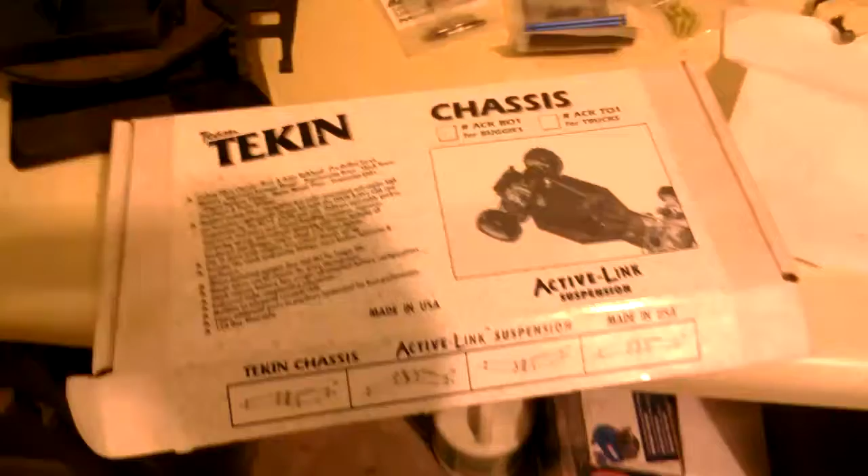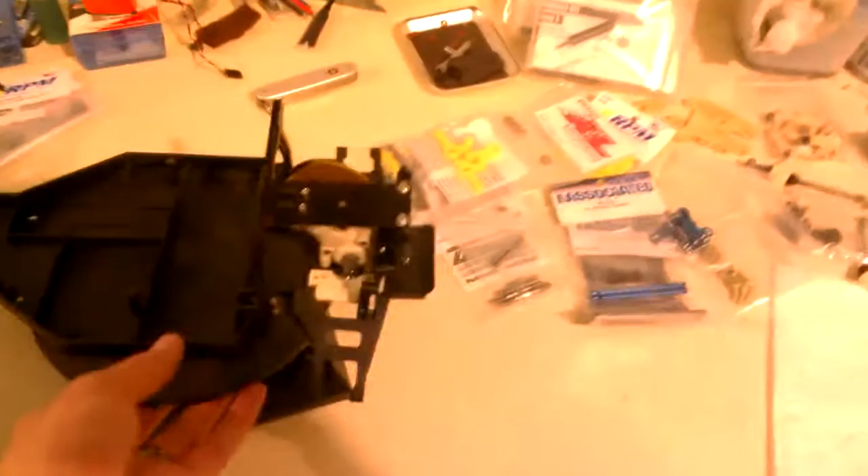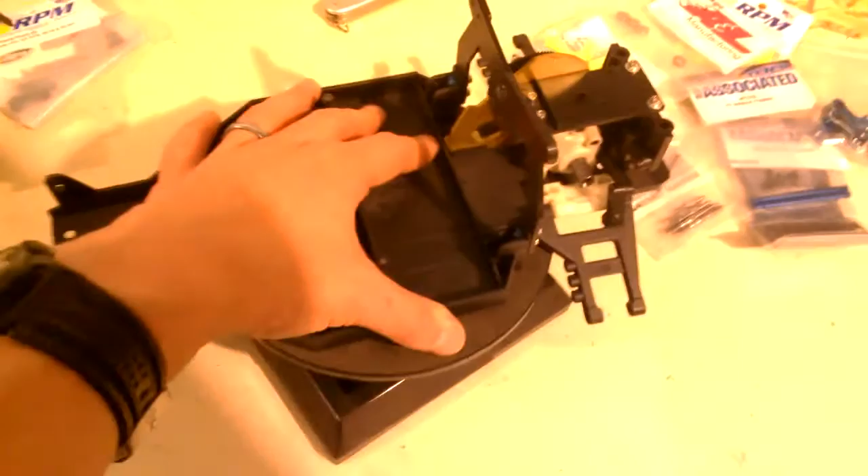Okay, so I completed a fair amount of the build for the Tekin mid-motor chassis here, the conversion for the RC10. Sorry it took a while for me to get to this point in the build. I wanted to make sure that I was able to procure as many new parts as I could, new gearbox, new nose plate, new everything, because this is a fairly uncommon chassis. And so I wanted to do it justice with completely new parts everywhere.

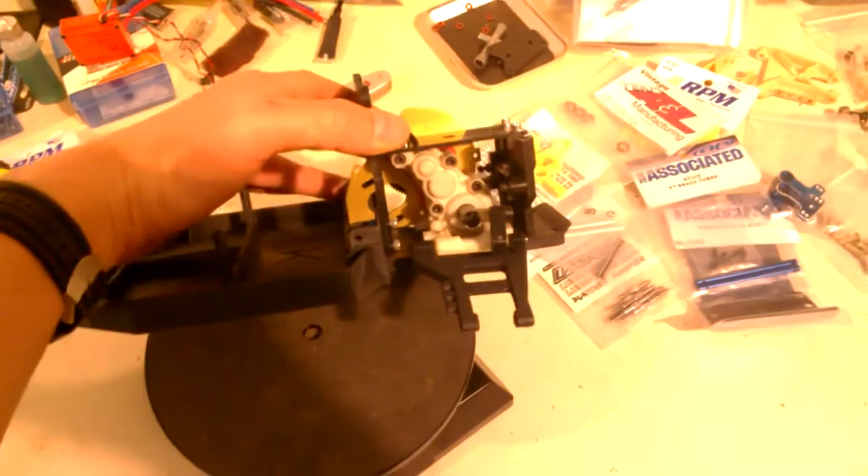So the gearbox is brand new. That's the re-released Stealth gearbox. Not cheap, it was something like $80 or so. I wanted to have a black nose plate, but original black nose plates were up until recently extremely hard to find. But now that the Worlds Car is re-released, these are relatively common now. So I got one of these.

And there are actually a few other parts I need to pick up. But in the meantime, I figured I had enough to at least get started on the rear end here, or to do most of it. So let's see. I'll get to the active link suspension part in a little bit, I'll explain that soon. But let's just start with the build and how it's gone so far.

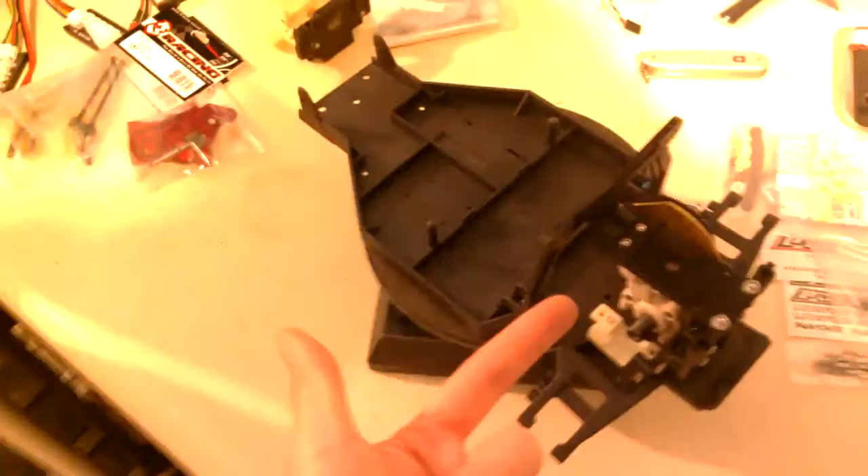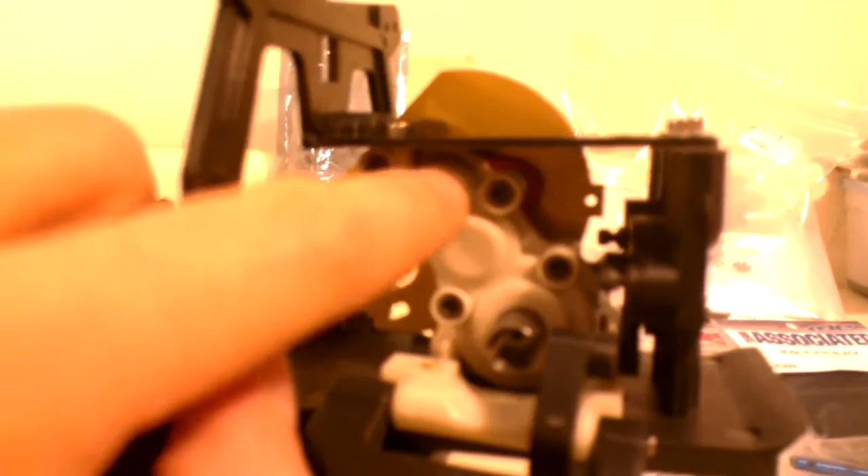The way that the gearbox works is it's actually what mounts first to the chassis. You basically just take the gearbox and you flip it around. But then that would mean that the input shaft gets flipped around to the other side. But you want to keep it on this side, so on the Stealth gearbox, there's a little cap piece that clips into a hole on either side. On the top part of each half of the Stealth gearbox, it's actually a hole, and you just put a little plastic cap onto the side that does not have the input shaft sticking out of it.

So you just have to pop that cap off, flip the input shaft around, put that cap on the other side, and flip the gearbox around. Now the particular Stealth gearbox kit that I got, this cap piece clipped on just fine on the other side, but when I tried to put it on this side, it kept falling out. So I had to use some silicone glue just to hold it in place. You can use Shoe Goo, whatever, just to keep it there. Otherwise, the gearbox went together just fine. No problems. The diff is nice and smooth. The parts fit just fine.

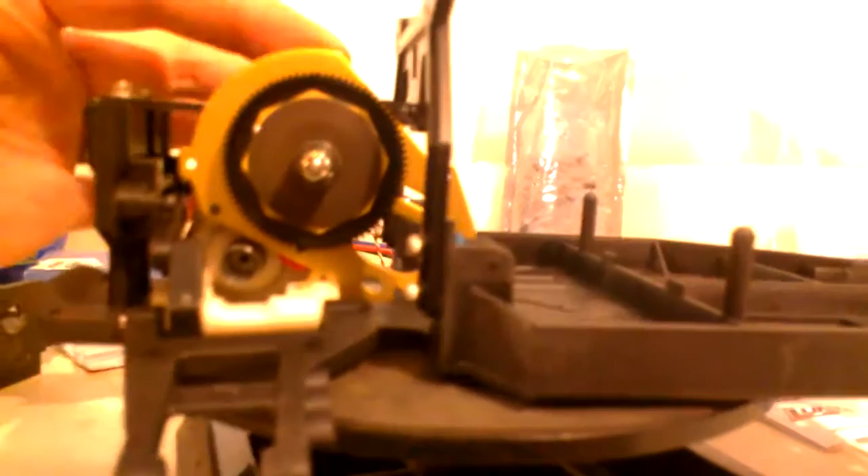The motor plate here, though, is specific to the Tekin kit. You cannot use a standard RC10 motor plate and mount it to this. If I had more time, I might have tried to get this sandblasted and painted a different color. But the gold is okay, I don't mind it too much. So basically, the motor mounts with your standard 4 screws at the bottom here. This motor plate mounts against the Stealth gearbox with these 4 screws, and it also mounts to the chassis over here with this 1 screw.

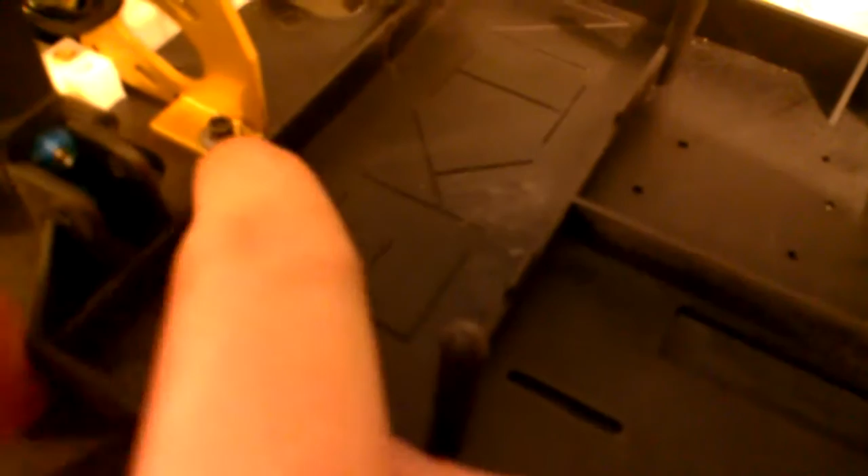Now, since this graphite composite chassis is conductive, there are these insulating hat bushings you have to put into this hole on either side of the motor mount before you screw the screw in. But the screw is actually a little bit long, and if you just do it normally, you'd find that the screw protrudes a little bit out of the bottom of the chassis. So what I ended up doing was adding another 1mm washer to the top here to pull the screw back a bit so that when it's fully tight, everything's nice and flush with the bottom of the chassis.

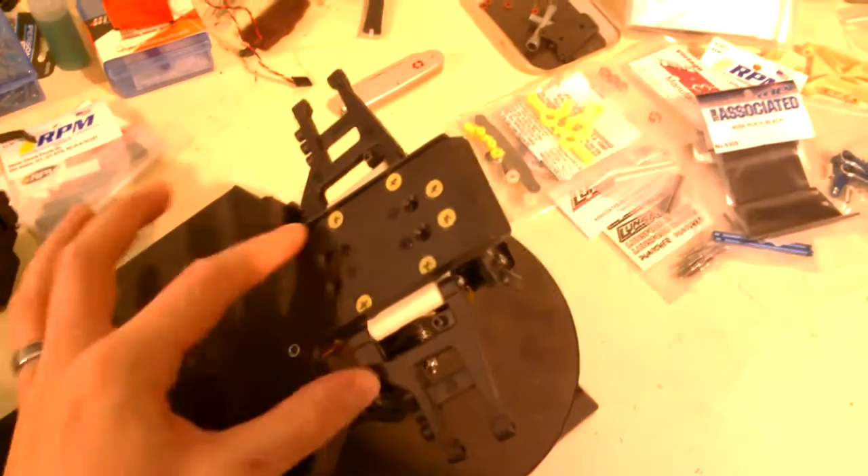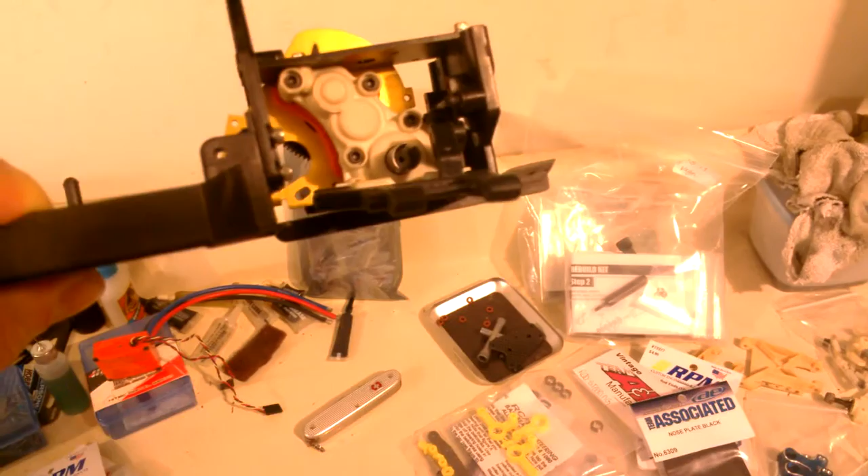One thing you do notice is that the bottom of the chassis is not completely flat. You have these little lips here on the back sides of the chassis. And so I do wonder what they're for, because if the car has a hard landing, these bottom lips are going to be the first things to scrape the ground. I can only guess that they're there to scrape the ground before any of these screws do, to sort of protect these screws. That's the only reason I could come up with, but I'm not really sure what the value add is there, because you're effectively losing a couple of millimeters of suspension travel before the car bottoms out. So, I don't really have an opinion on that.

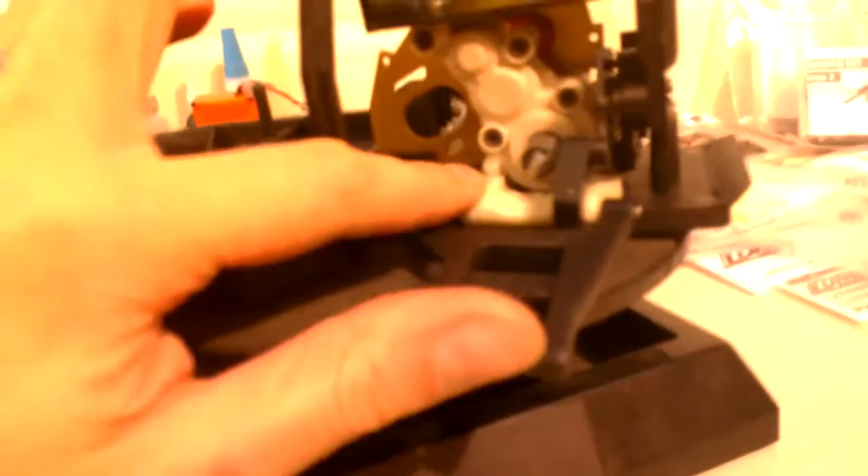Okay, so you mount the gearbox, you mount the rear suspension arm mounts, these white pieces here, and they tell you to not use the 3-degree mounts, because that'll give you too much rear toe-in, and that's apparently not something you want with this mid-motor setup.

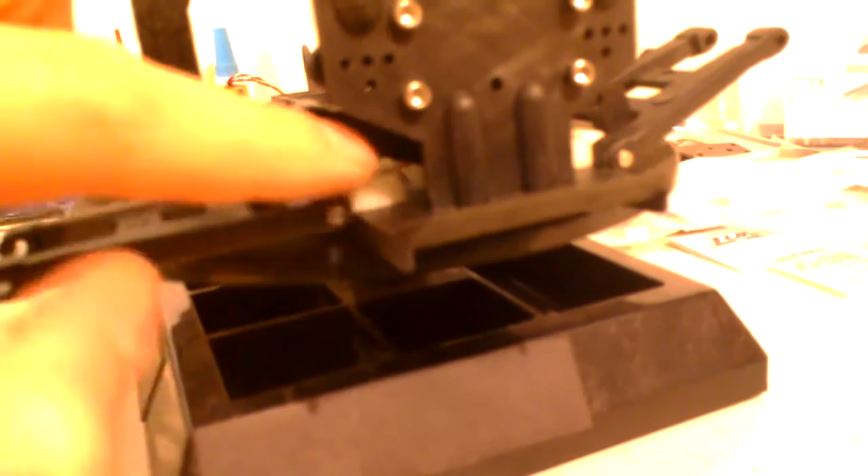It does turn out, though, there are a few things you have to keep in mind with these mounts. The first thing is this active link suspension has one link on one side with this arm piece here that runs on the low side, and then on the other side you have an arm piece that runs on the high side.

So on this side it's no problem, but on this side what happens is the screw that mounts the rear of the rear suspension arm mount protrudes up past the mount, and so on this side that can scrape against this little arm here. So you actually have to take a Dremel and just sort of cut the top part of that screw so that you have clearance here, okay? So it's one thing to keep in mind when you put this together. You have to cut that back screw on the suspension arm that has the low side here, okay?

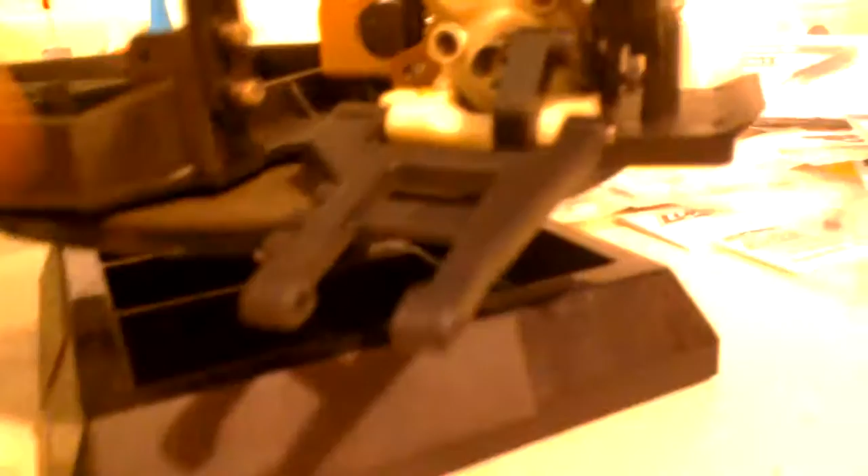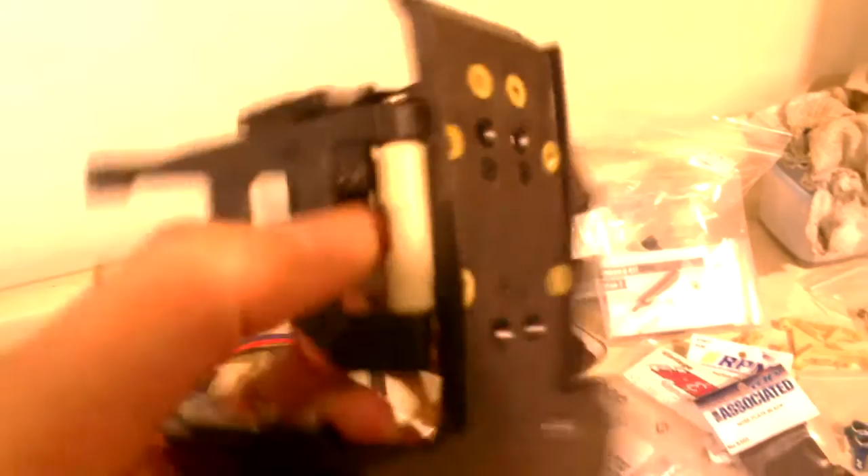The other thing is these arms are part of the Tekin kit. They're custom arms, and the reason for that is because there's a little lip here with a hole that mounts to part of this linkage assembly here, okay? So if you want to run this linkage assembly, you don't have to. Again, I'll get to that in a minute, but if you want to run it, you got to use these arms, okay? Otherwise, you can use the stock arms, but if you use these arms, they are actually a little bit longer than the stock arms.

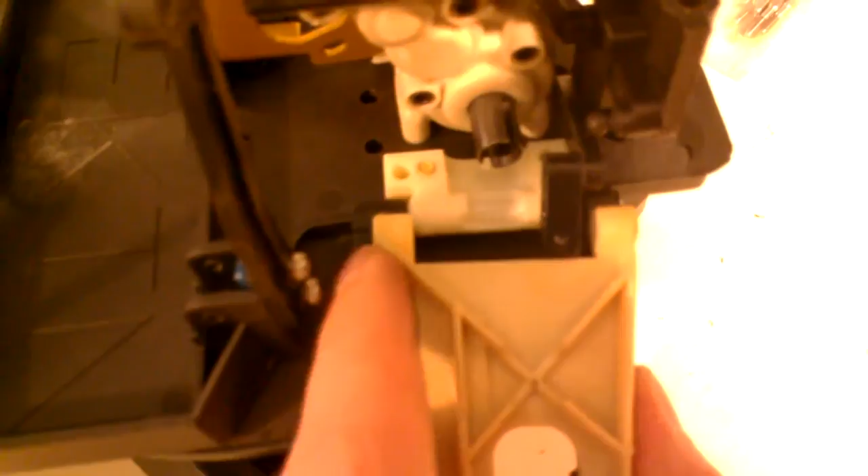You notice this edge here runs a little further out. And it turns out that as a result of this, you cannot use the stock hinge pin to mount these arms. Right now I have the stock hinge pin in here just as a placeholder, but you can see it comes out on this side, but it doesn't come out on this side. You got to use a longer hinge pin. And this length here is about 2 inches.

There is an RC10 GT rear arm mount hinge pin. It's like 2.038 inches. I think that'll work. I ordered a pair off eBay. When those come in, I'll try them out. Hopefully it'll be sufficient to clear on both sides, and I can put E-clips on both sides, okay? So that's something to bear in mind.

Now, I did mention that this active link suspension is optional, and the reason for that is because the rear bulkhead that comes with this kit does have static mounting holes here that you can mount your inner rear ball stud on, and you could pick whichever position you want, and you could just run that kind of suspension system, so to speak, on this mid-motor kit, so that you're not using the active link suspension, but you are leveraging the fact that this is a mid-motor chassis.

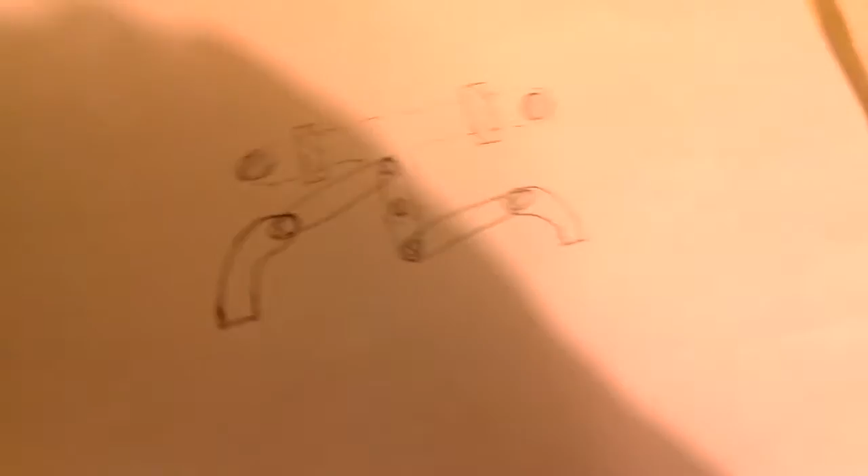If you want to use the active link suspension, you got to build that active link setup, which is back here, and you got to attach these arms. Now, how does the active link work? Well, it's a little hard for me to show you with the lighting here because all those parts are black. So what I did is I drew it out. Okay, so pardon the not so super duper drawings here, but this is basically how it works.

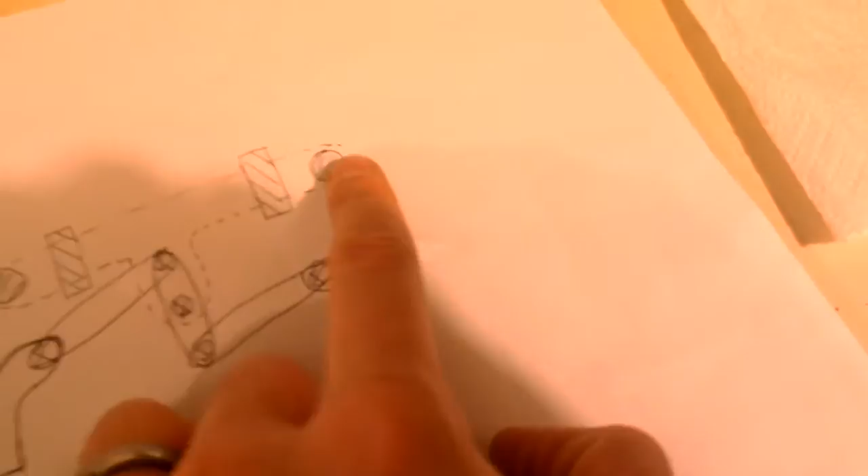So this little piece here is this guy, and this arm here is this guy right here, okay? And then where you see this ball stud, that's this guy. So these are your ball studs left and right. These X marks are where you have screws where things can pivot, and this little T plate here is this movable plate where the ball stud mounts, and then this bar here, it's like a brace on either side that allows the T plate to slide around.

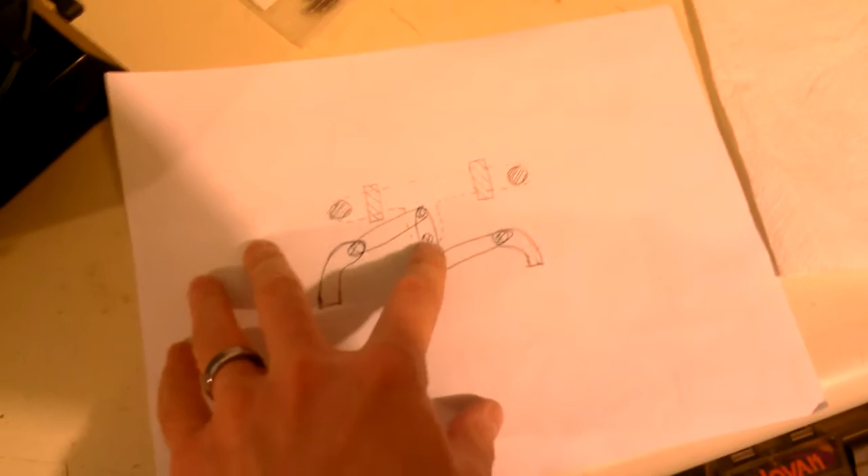Okay, so what happens? Basically, the idea is with this type of setup, when the car is taking a corner, normally what would happen, let me get my RC10T out here and I'll show you. So with a conventional suspension where you have fixed ball studs on the inside and the outside, if the chassis rolls to one side, okay, what ends up happening is the outside wheel develops a positive camber, okay? And then if that positive camber is too aggressive, then you end up riding the sidewall of the tire where there's no tread, and the car can slide, okay?

Likewise, when the suspension compresses this way, okay, both the inside and outside wheel develop a negative camber. So you have some amount of camber gain depending on whether the car is rolling or at full droop in the air or landing when the suspension is compressing, okay?

And the idea of the active link suspension is to sort of cancel that all out so that no matter what the suspension arms are doing and how the chassis is rolling, the tires are completely upright, at 0 camber, or whatever your static camber is. And the way that works is basically this little T-plate here can move around, so what that means is your inner camber link ball stud can move around as the suspension arms are moving around. So that means you have dynamic camber gain.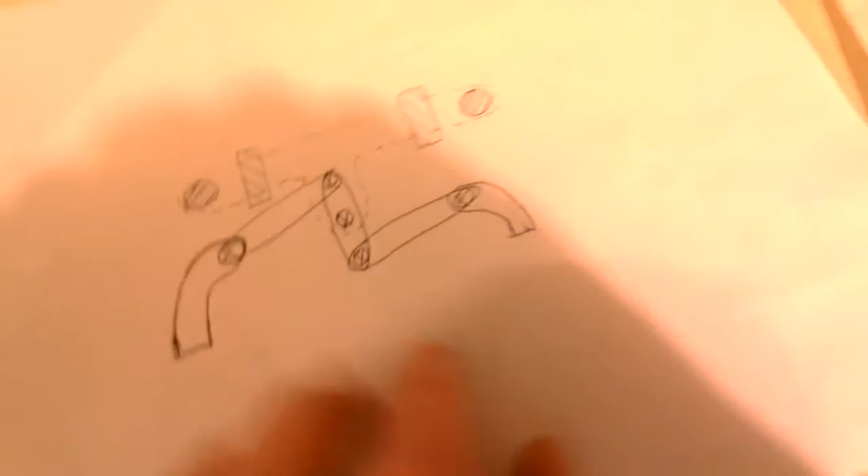So suppose, for example, that the car is turning right, so it's rolling to the left. That means this suspension arm will start to compress. Okay, and you'll see that this ball stud starts to move to the inside. So normally what would happen again is this outside wheel will try to go to a positive camber, but then that ball stud moves in to pull the wheel back to keep the camber at whatever your fixed camber setting is.

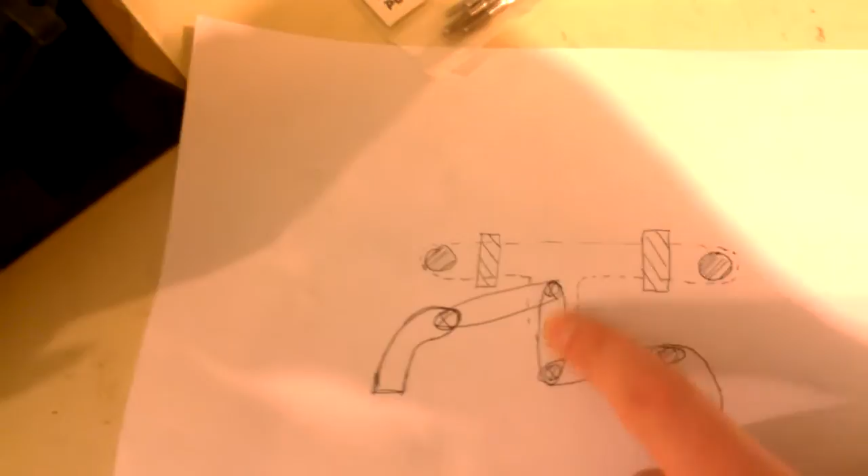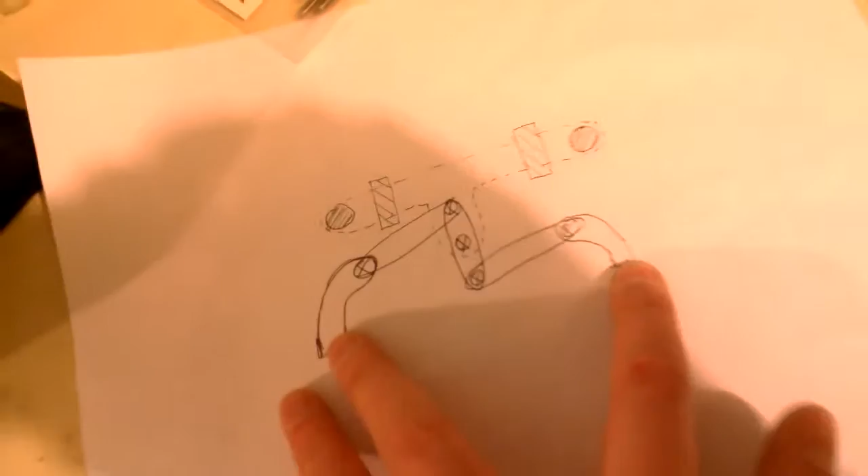And so the way that works is, this assembly would be for this side of the chassis. This arm raises up, and as that arm raises up and this one sits still, this link here pushes against this guy. This is another link in the center that can rotate, but it pushes against this, and it pushes this whole assembly out to the left here. And likewise, if only this arm moves up, it pushes this link and it pushes this whole T-plate over to this direction.

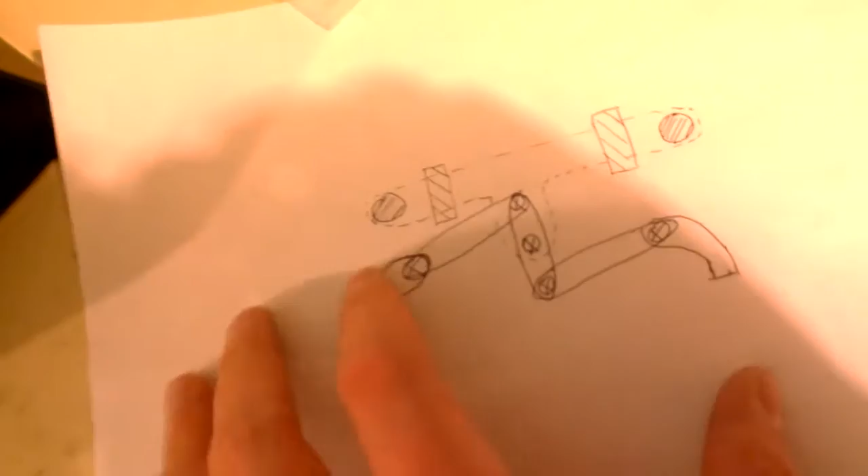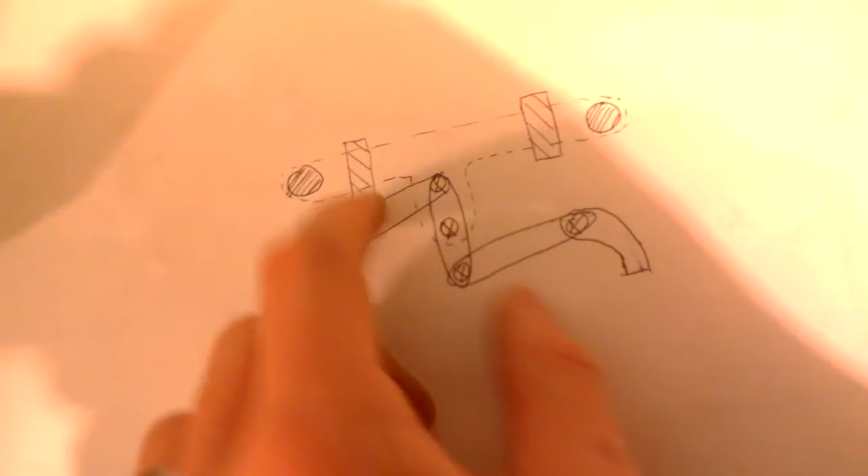Now, what happens when both suspension arms compress? Like say you're coming off a landing. Then what happens is as this suspension arm moves up and this suspension arm moves up, each of these links here want to move towards the center of the chassis. And so what ends up happening is they cause this piece here to rotate around this point here.

Okay, so that's how they enabled a suspension link system where the car can lean under cornering in one direction or the other, and you could have this piece move in or out. And then if both suspension arms are moving, this sits still. This doesn't move at all. And you just have this guy moving rotationally to accommodate the fact that both suspension arms are compressing. Okay, so that's kind of a neat little setup there.

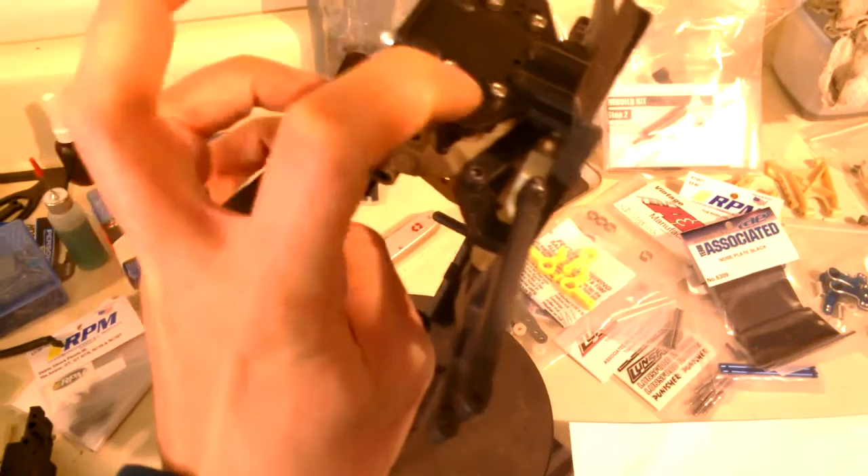Let's see, is there anything else I wanted to mention here? Well, yeah, I think that's it for now. This is where I am in the build. Basically, this is all set up. Again, you don't have to use this active link suspension. If you want to, you could just take that out and use these fixed positions here for your inner rear ball stud. But I figured I'd try it out because it's kind of interesting and it's unique to this chassis.

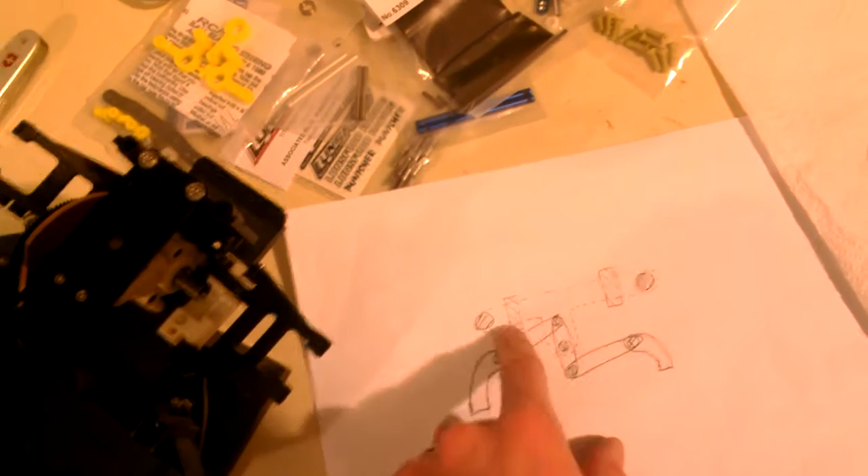The only downside is that it does seem to limit your total suspension travel, because eventually, if both suspension arms are moving up because the suspension's compressing, this will rotate and then it'll lock up as these two links try to touch each other. So there is a limit to exactly how much droop you can get and how much total compression you can get on either side of the chassis. So that is a limitation here.

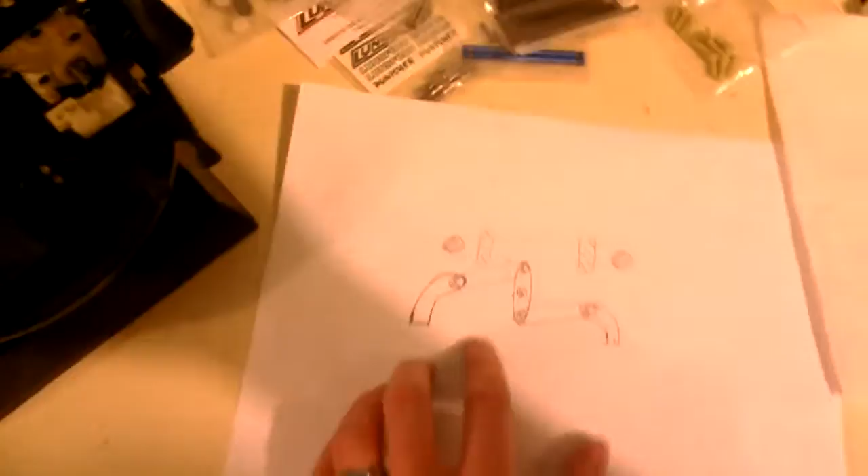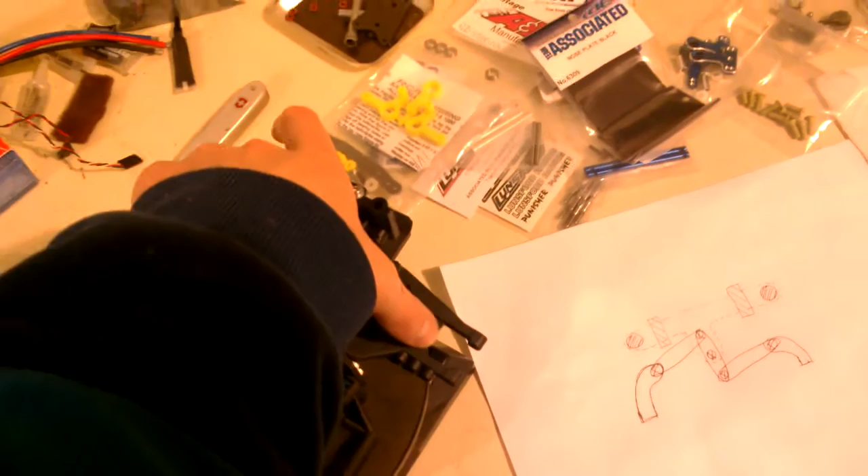And there is a little bit of binding in it. You try to set it up so that when you screw each of these pieces in, it's tight enough to hold it in place, but just loose enough to get free movement, but you have a lot of moving parts here. So it's more overall friction in the suspension than if you did not use it. So that is another disadvantage, but it's still kind of neat.

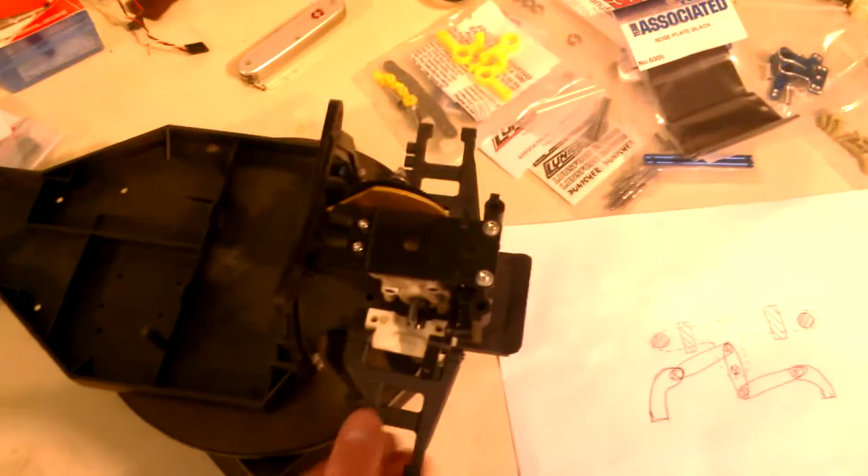In time, of course, I'll get through the rest of the build. I still have to get another couple of parts here or there. I'll finish the rear. I do have the rear shocks here somewhere in this pile, so I'll put those on. I got to do the rear drivetrain. I want to get brand new CVDs for the rear, so I'll do that at some point. And then once the rear is all done, I'll go to the front and put the front on. Basically, all you do with the front is take it off your old RC10 and plop it onto this. There's nothing special you got to do there.

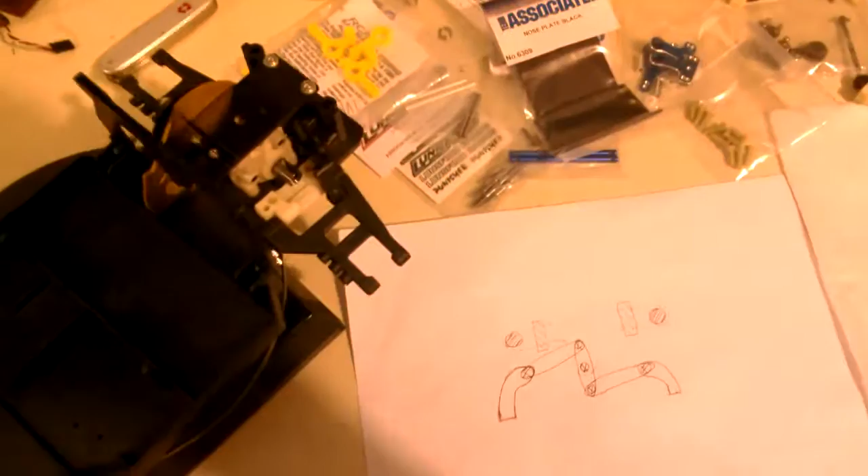Steering rack, I am leaning towards using this A&L steering rack just because it's different, but I do have a stock steering rack. I also have this blue aluminum steering rack that was in the blue RC10 that I put together a few months ago. You can go watch those videos. So, yeah, in time I'll have some more stuff on this and I'll make another video.